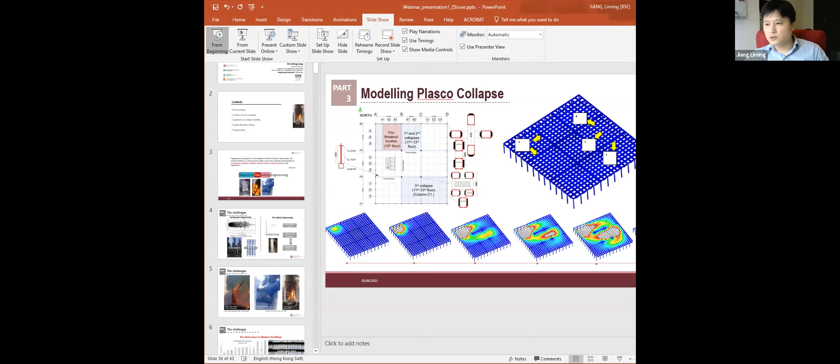I'm Liming Jiang. I'm currently assistant professor in building services engineering in Hong Kong PolyU. I'm working in the area of fire safety of building structures, and particularly we focus a lot more on computational modeling, but we also do experimental test work.

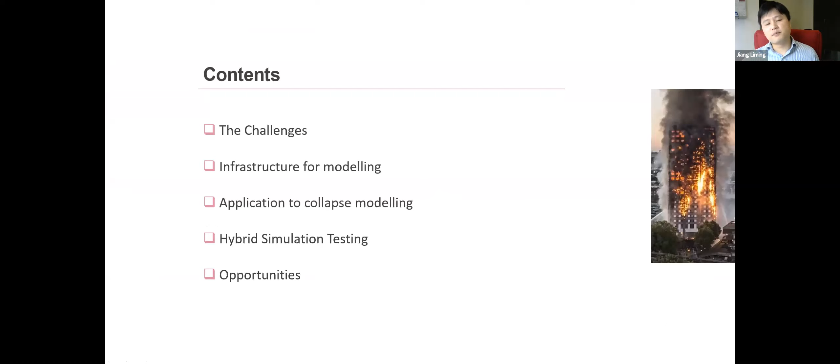So I might start with some challenges in my mind about modeling building structures regarding fire safety. If you check Wikipedia, there is a definition of engineering: engineering is the application of knowledge in the form of science, mathematics, and empirical evidence to the innovation and design of structures, machines, materials, software, devices, systems. So if we look at the term structural fire safety engineering, we see these three keywords: structures, fire, which is loading, and we care about the safety of the structure.

And looking at the engineering definition, one of the powerful tools is software, which can be implemented with devices and systems to ensure the safety of buildings or structures in a fire. If you look at two different categories of civil engineering, one is to design structures against earthquake loading. We have a lot of tools to estimate the safety performance of buildings in earthquakes. We have a large library of ground motion curves to represent different levels of earthquake ground excitation, we can do shake table tests and cyclic loading tests, and FEM tools are ready to use for modeling earthquake responses.

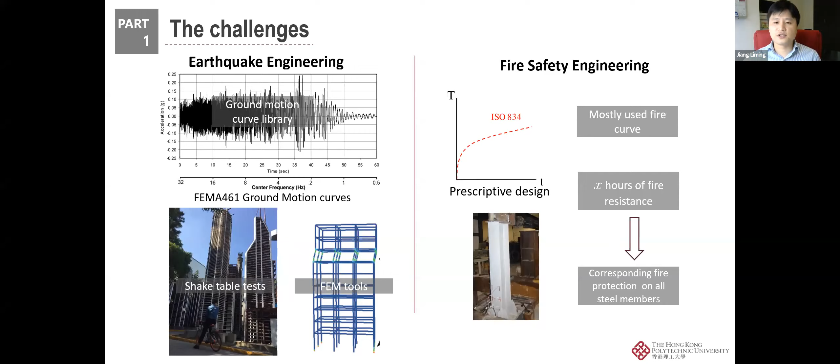But on the fire safety engineering side, in most countries and regions we still adopt the ISO 834 standard fire curve, which adopts a time-temperature curve with uniform temperature distribution. So the design of the structure is based on the prescriptive design approach. We basically apply fire protection or fire safety measures to meet the requirement of 2 hours or 3 hours of fire resistance. So these are two different levels of design regarding different loadings, and that's why we need to conduct more research to ensure the fire safety of buildings when fire becomes a major threat to the building.

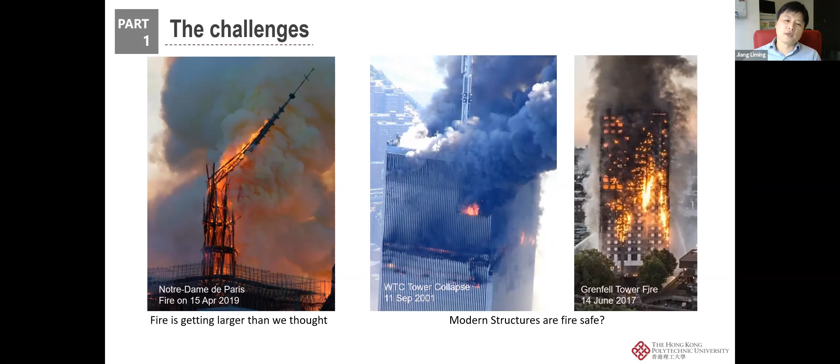So these are shocking cases, actually, totally out of our expectation, especially 9/11, the WTC tower collapse, which turned out to be caused by the fire rather than the impact loading of the airplanes. And in the recent Grenfell Tower fire in London, the scale of the fire hazard was beyond our expectation, and the fire spread all over the whole building. So that posed the question of whether modern structures are fire safe, and what is the resilience of these buildings in a fire scenario. This requires researchers and fire safety engineers to conduct experimental and numerical studies. But what are the real challenges now?

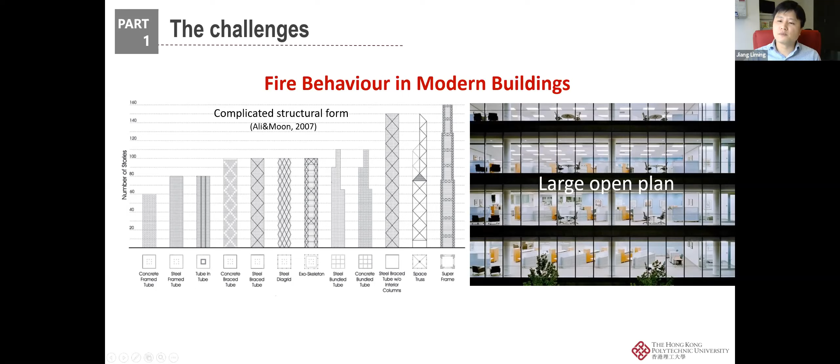For fire behavior in modern buildings, the left-hand figure shows the different forms of tall buildings. Engineers design these tall buildings with different frames, mega frames, and inside the building the compartment becomes a large open plan space. When fire occurs in this kind of large open plan compartment, the fire behavior is totally different from the traditional thinking, because the standard fire curve we just mentioned, based on a uniform time-temperature curve, is a post-flashover fire scenario.

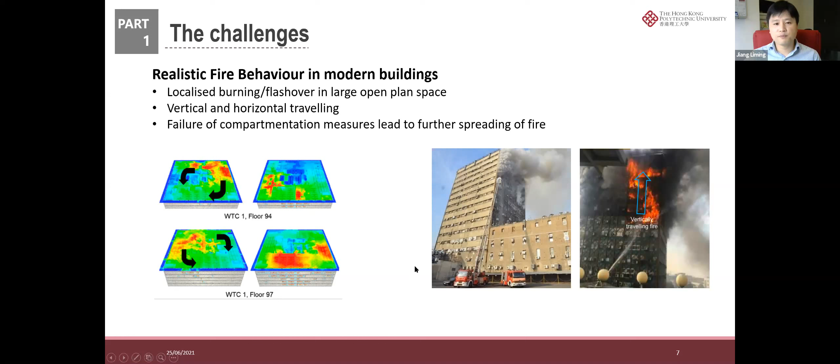But in reality, when the compartment is large enough, like in the investigations of the WTC towers, the burning is localized, and then the localized burning area actually travels along the floor plan. So that means the uniform time-temperature curve, or the ISO 834 curve, will not be valid to use in these scenarios. To determine the fire behavior requires a lot more research to characterize it. And one of the major movements is to introduce a traveling fire concept.

And this Malveira test was conducted by a group led by Professor Jose Torero, and I think you might be quite familiar with it. And this paper is written by Juan and other colleagues. So these tests actually demonstrate the different modes of the fire in a large compartment. It starts localized, and then it travels. So you see that the fire actually travels from the initial end to the other end, and localized flashover occurs at about 270 minutes.

So this is not what we thought about the compartment fire, because normally a compartment fire will have a localized fire at a very early stage, and then the spontaneous ignition of all the combustible materials causes the flashover, and then it enters a very high temperature regime. But this traveling fire test actually demonstrates that the traditional thinking, or the traditional model for fire safety design, may not be valid in modern structures.

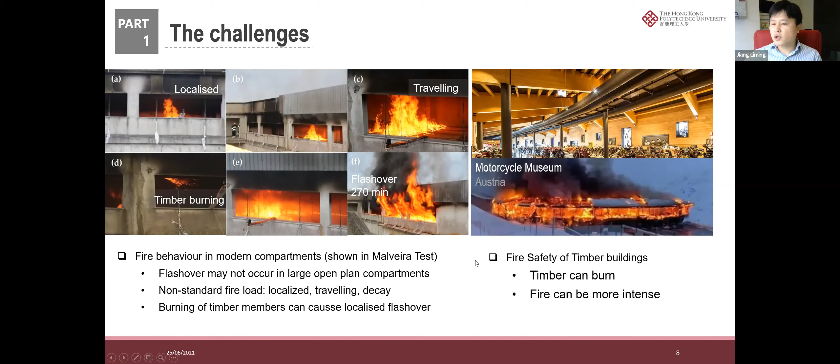And especially when we're trying to use innovative structural materials like timber, CLT, or glulam. These timber materials also introduce another challenge, because the timber material itself can burn in a fire. So the parametric fire model will be completely different, because there will be another surge of heat flux when the structural members get ignited.

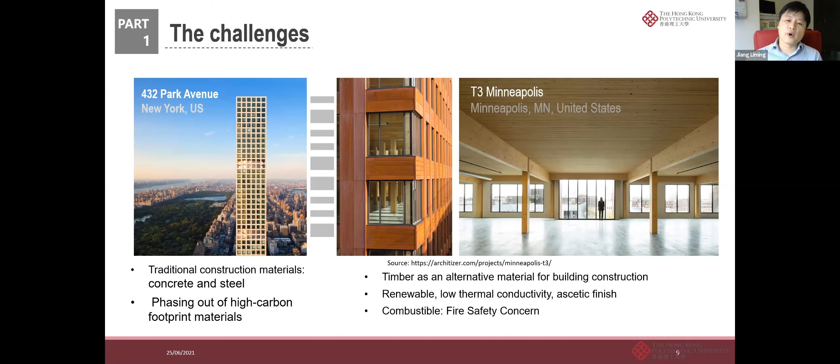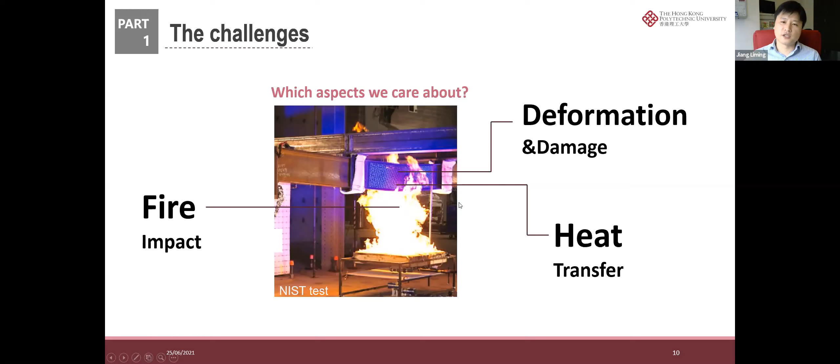So then the structural member, like here a steel beam, will experience deformation and damage if the fire is large enough. To understand this behavior, from the fire to the structural response after material degradation and thermal expansion, two categories of approaches can be used. We can use lab tests or real-scale tests, like the NIST test, or the famous Cardington test, a whole 8-story building at real building scale that was tested. From this Cardington test, we learned a lot of different mechanisms we had never paid attention to, like the effect of the floor slabs.

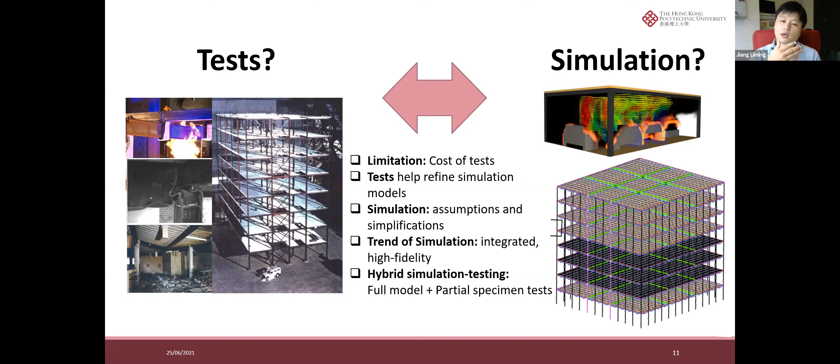For the other category, we can surely use simulation, because computers are now critical in our daily life, and you can use all this computational power every minute. But what are the limitations? For tests, it's the cost, and for simulation, we need to adopt assumptions and simplifications. That's why a lot of researchers may be skeptical of simulation results; they are more confident in test results and don't trust simulation because of the lack of fidelity. But in the end we need to use simulation as our tool, because we cannot do design using real-scale tests. So that requires a simulation tool to predict the behavior of a building in a fire.

So what is our solution? In 2009, at the University of Edinburgh, we adopted OpenSees as our platform to conduct structures in fire analysis. OpenSees originated from UC Berkeley and was initially designed as an open system for earthquake engineering simulation. It is open source, written in C++, the interpreter scripting language is Tcl, and recently Python was enabled. For OpenSees for fire, we reshaped the original open source code, extended the modules, and added new modules to simulate structures in fire. So we have the fire modules, the heat transfer, and a lot of code for the thermo-mechanical analysis.

And recently we have the OpenFire project that connected to the CFD tool FDS, and connected FDS to the OpenSees HT, the heat transfer module. So this actually enables us to do a lot of research, frees our hands to realize a lot of ideas that are in our mind when we're doing the investigation, because OpenSees for Fire is a modular

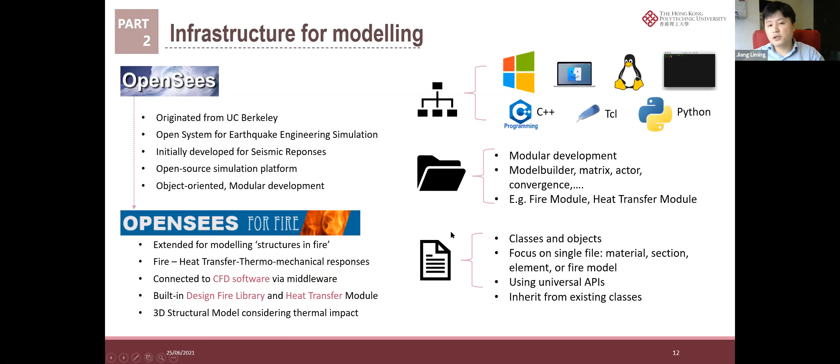So that significantly reduces the learning effort in conducting new computational approaches or methods when you have some great ideas for modeling something. This open source environment significantly reduces the learning effort compared to other software packages, because they are written in Fortran, which is structure based, so it does not have this modular development environment.

So we have a website which is maintained for OpenSees for Fire, and you can browse all this information, and we also provide its command manual and examples. This website is always under development because we are putting in a lot of new codes and new examples along with our published papers. You can follow all of these updates on GitHub, and you can see the command manuals and examples on this website. So you can search for OpenSees for Fire, and you will be guided to this website.

So as we mentioned, within this platform we are focusing on 3 different aspects of fire. First, the design fire models. If you recall, for the earthquake engineering problem, we have a lot of ground motion curves. So we can have small, moderate, or large earthquakes, which represent the different levels of loading that can cause damage, failure or collapse of the structure. But for fire, we don't have this library.

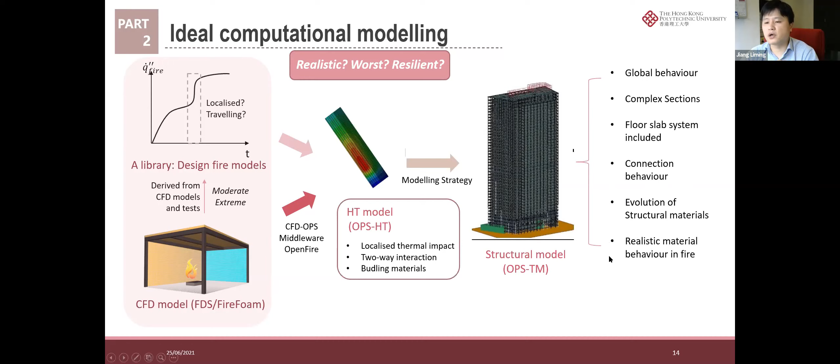And also when we have these new structural materials, that also causes a challenge in the structural modeling. So this is a roadmap of our OpenSees for fire, and by 2020 and 2020 to 2021, these are almost done. So in terms of the different categories or modules, we have done this work, and we have our planned work that is after 2021.

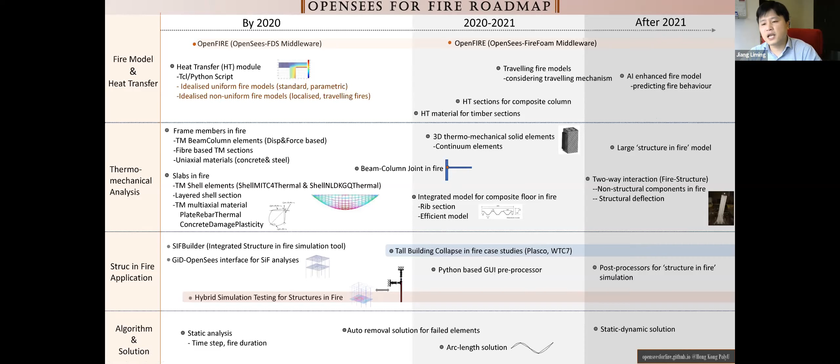So then it's gradually adding into OpenSees for fire, and we are happy to collaborate with other research groups. If you have some findings you want to implement in OpenSees for fire or in an FEM platform, we can help you to implement this.

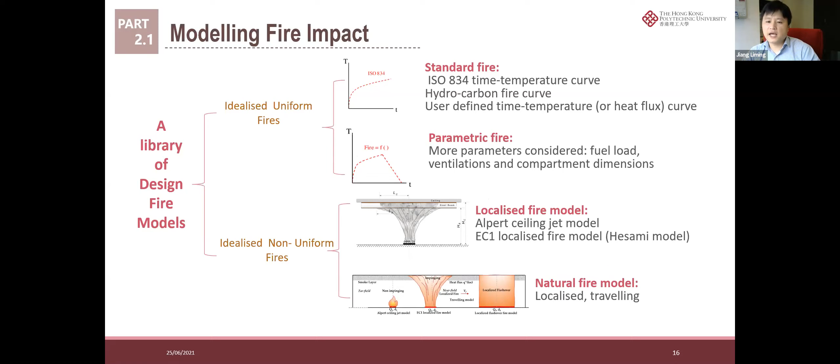And for modeling the fire impact, as we just mentioned, we try to establish a library of design fire models. So it's not limited to the standard fire, parametric fire, and localized fire models. We want to introduce some natural fire models representing moderate and extreme fire scenarios, and it also represents the traveling behavior horizontally and vertically. So that is our vision for the design fire models corresponding to the ground motion curves in earthquake engineering.

And as we mentioned, another approach is to connect OpenSees with FDS or CFD, like FireFOAM. FDS could be the CFD tool. So that is to create a middleware which transfers the data from FDS or FireFOAM to the heat transfer module in OpenSees. This is currently ongoing, and we are adding more elements or components into the OpenFire wrapper. That is carried out by Atif, one of our PhD students in the group.

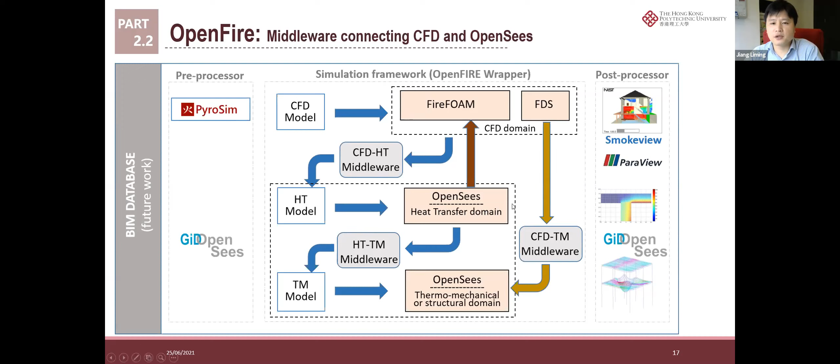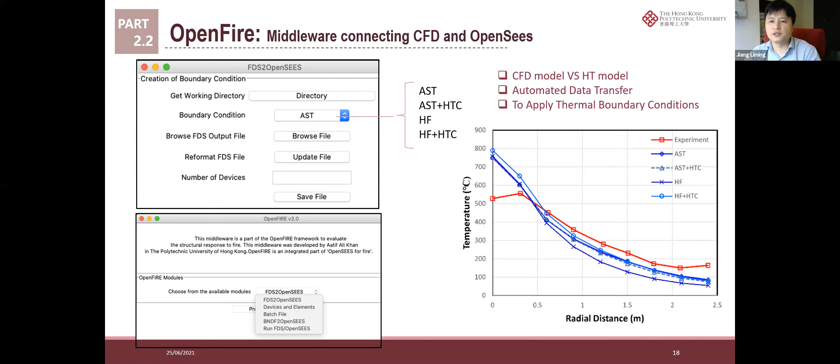So OpenFire is written in Python, and you will have drop-down options where you can choose the different boundary conditions. It's meant to be a graphical user interface, and it will simplify the modeling work between FDS and OpenSees HT. You can have a realistic CFD model and then implement this CFD model in OpenSees HT. So you can either use the AST or AST plus the heat transfer coefficient. We can make some sophisticated heat transfer boundary conditions between the fire and the heat transfer model.

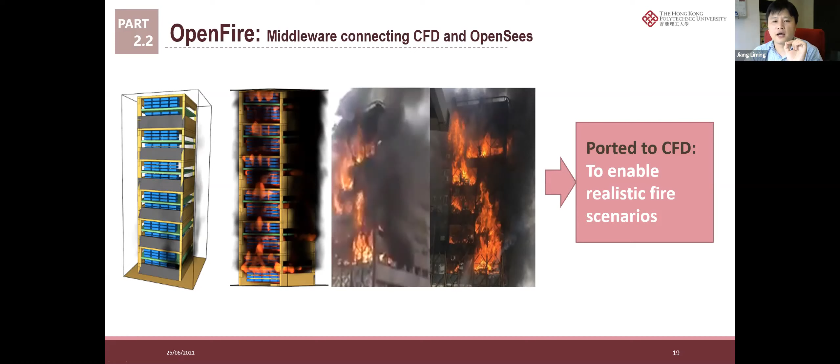So when we're modeling heat transfer, we know that the temperature of the structural member section will increase in a fire, because at the surface, due to convection and radiation, there will be input heat flux, and on the unexposed side there will be heat loss to the ambient air.

So when we're trying to model the heat transfer, some problems have been mentioned, like how we address the localized fire impact, and also how to address the heat transfer in some new structural materials like timber, and also some non-structural materials like fire protection materials that should be modeled in the heat transfer process.

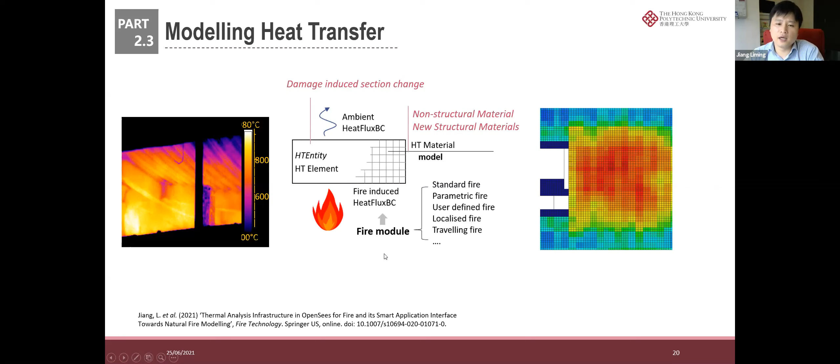And also the damage-induced section change. That will change the exposed surface of the structural section. The heat transfer will change significantly if the section changes, like the concrete cover being removed due to spalling. That will change the depth of the heated region. So these are the heat transfer issues that we are trying to resolve.

So for the localized and non-uniform time-variant fire impact, I think it's currently a reasonable assumption that we model the heat transfer on a structural member basis. So we analyze the heat transfer in each single member, like a beam, column or slab. And we have examined whether we can use 3D or a number of 2D sections to estimate the heat transfer in the structural members.

Because if you use 3D, heat transfer normally requires a lot more elements to capture the heat gradient, because near the exposed surface the temperature gradient is significant. So then we need a large number of elements.

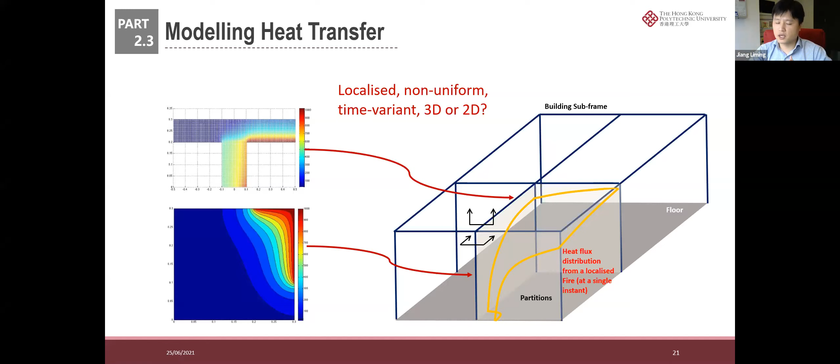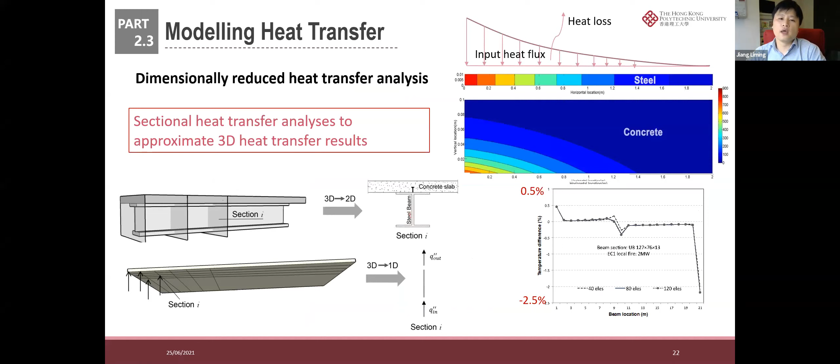So if you use a 3D member or 3D heat transfer model for the whole building, when the fire is hitting different compartments, then the heat transfer analysis will require a lot more computational resource. So one of the solutions is to use a 2D sectional analysis. And we found that if the input heat flux is continuous, then we can use this 2D analysis just at the representative sections to estimate the heat transfer. So this is for the heat transfer issue for concrete and steel structure members.

So if we have timber sections, which again showcases the great capability of an open source platform, we can implement our ideas modeling the timber sections subject to fire, because we know that timber forms different layers when it is exposed to fire. We can have a layer transition modeled in the timber section, with a tag to represent the different layers, changing from the original wet wood to dry wood and to the char layer. And specifically, we can have the heat generation calculated or modeled in the char layer.

So that can address the low heat flux environment. Like when the heat flux is only 20 kilowatt per meter square, we know that the timber member can be ignited. But if you're using the Eurocode 5 model, it's a heat consumption model. It does not have any heat generation. So you will never be able to model this kind of situation using the EC5 model. The only solution is to introduce the heat generation into the char layer. And so in our platform, we have added this for the timber sections.

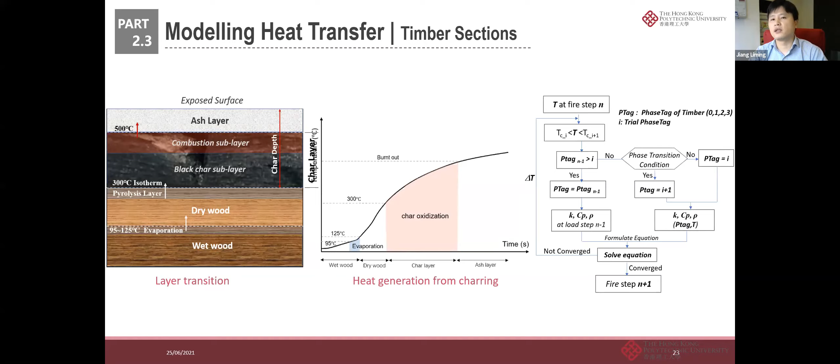And the next step, we are now developing the structural model for the timber components. So this open source and object-oriented platform has enabled us to model these timber sections and others. We can actually introduce more innovative structural materials if we have the options. If we have a list, we can introduce more, and we can use this software to estimate the thermal response and the structural response, and then validate the results using tests.

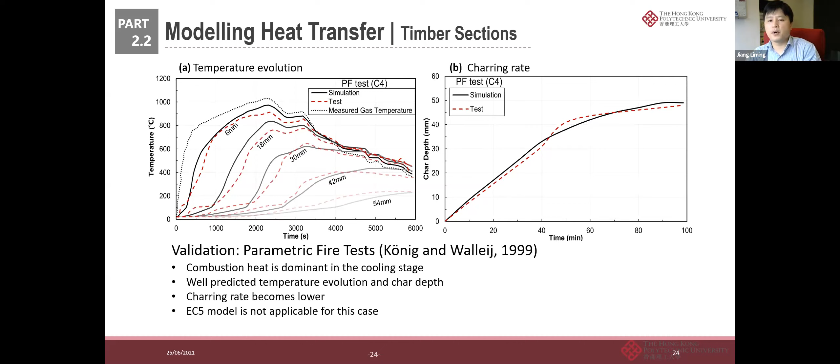In our paper, we have presented a lot of different cases using heat flux and other cases, like heating, cooling and reheating. So we validated our results. So this again demonstrates how real tests can help the advances of the modeling software. So we always need to rely on the tests and the software, but in the end the software will be a key solution, because we need to predict the behavior rather than using tests to capture the behavior.

So for the structural response, for earthquakes, you may be able to use a 2D plane frame model, or you can just use a lumped mass model to capture the behavior, because the slab can follow the rigid slab assumption in earthquakes. But in fire scenarios, we know that in a compartment fire, the slabs co-working with the beams and columns will behave completely differently if we take out the slabs.

So that's why for a high fidelity 3D model we need to model the slabs, which is a great challenge for our work in OpenSees for fire, because the original OpenSees does not have any suitable slab model for fire or for earthquakes. So we need to build all these components for the slabs.

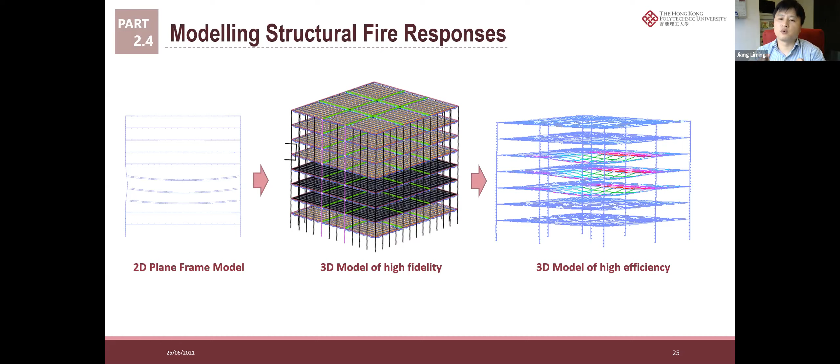And after that, the next step, we're looking at how to efficiently model a whole structure or a large model, and how to improve the efficiency of this model. So we need to find the real factors, and then reduce the scale of the models, because otherwise we cannot do a faster response or prediction model, especially in an emergency case. We need to very quickly estimate what will be the next failure or the collapse.

So for the whole structure model, the traditional approach uses beam elements or beam column elements to represent the beams and columns, which is quite efficient because it's just like a bar, and you can use uniaxial material to capture the behavior of this flexural beam. We have fiber-based sections, and you can have the displacement beam column 2D, 3D as a structural model, which is very common.

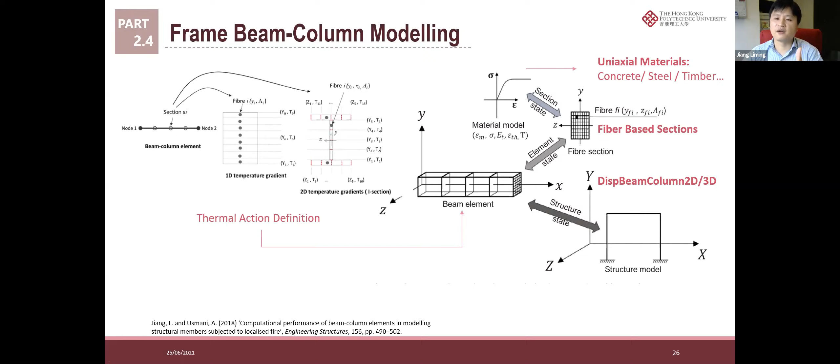And for the fire cases, we have tried to address the localized fire action for these beam elements. So that is another challenge when we have this complex fire behavior: how we model the frame's response to complex fire behavior, like fire that travels in the floor and vertically.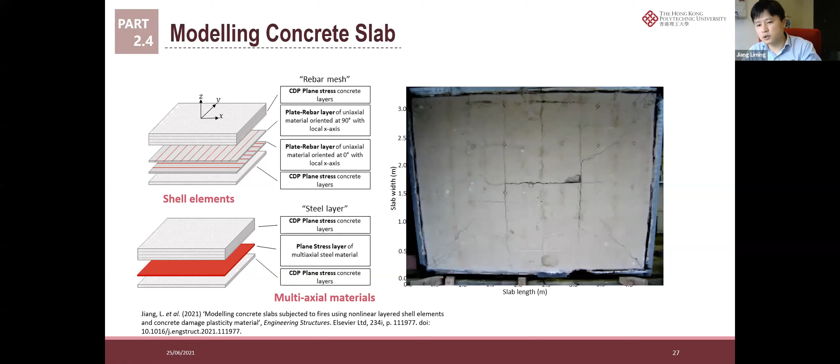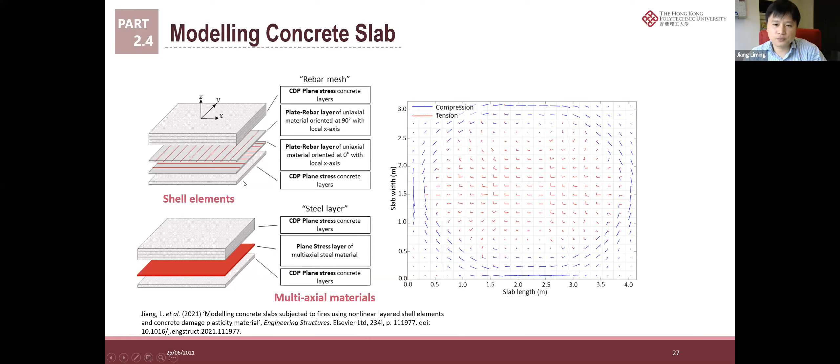When we look at real steel buildings, we know that composite floor slab with profiled steel decking is a common choice for steel or composite structures. And this kind of geometry raises the complexity of modeling. So in our recently submitted paper, we try to model this composite floor slab in the context of a large model. We cannot use a very detailed 3D model to represent the flat or thin part and the thick or ribbed part.

We need to achieve a balance between model efficiency and accuracy. So what we propose is to use an offset reference plane, and then we can have this tapered section modeled in the composite slab section. We package all these definitions in one section, which is a composite floor slab section. That's what we compliment about the open source OpenSees for Fire, because we can just focus on one class to realize this modeling approach.

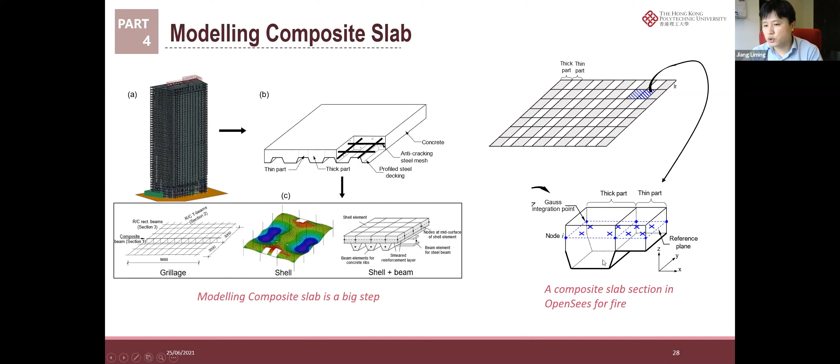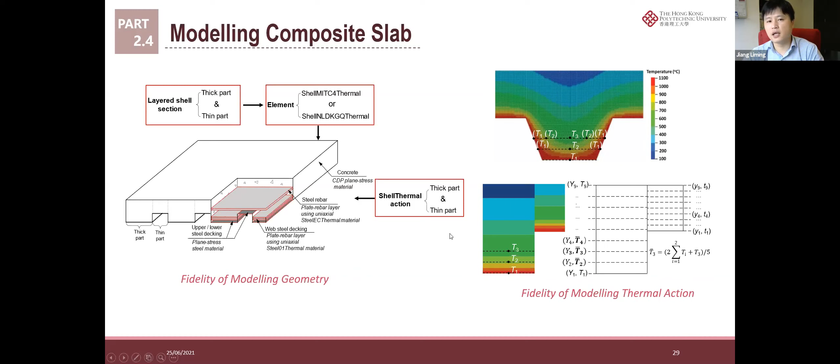Here, we demonstrate that we just use a composite slab section, which can deal with the geometry and also the thermal action. With the offset reference plane, the ribs are represented with a higher thickness, and we can have the steel decking with layers to represent the materials, concrete and steel. In terms of the thermal action, we can estimate the U-shape temperature distribution in the rib section. This is all packaged in the composite slab section, and we can still use the normal shell elements and all these analysis components.

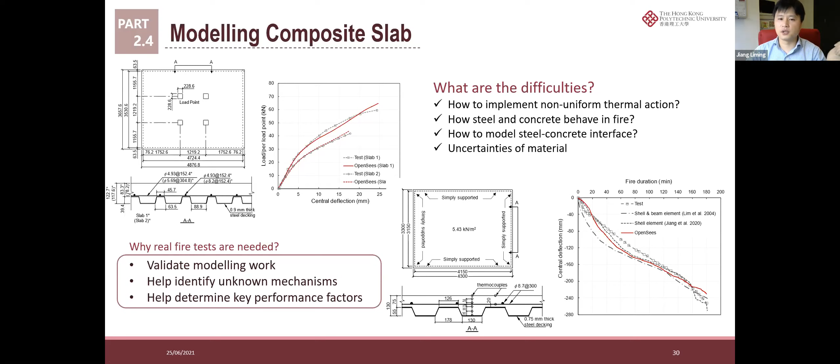So these are the validation cases. I may not further explain them, but you can see the difficulties we mentioned because of the geometry, and we need real fire tests to validate our work. Tests and simulations should always be conducted to improve our understanding of the different behaviors of structures in fire.

And also we need to model the connections. Recently we started to look at connection behavior. We have a behavior model for a connection, a zero-length element between the columns and the beams, and we also have an element removal technique. Once the connection reaches a critical limit of deflection or deformation, that means failure of the connection. So we can remove this connection to represent, after failure, what the structural response will be and how the global behavior is changed by the removed elements.

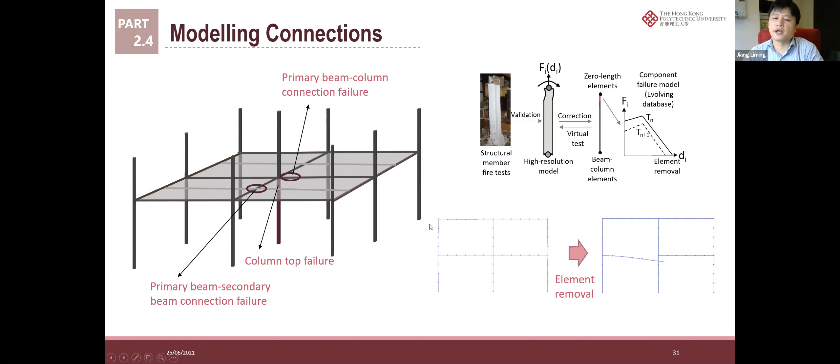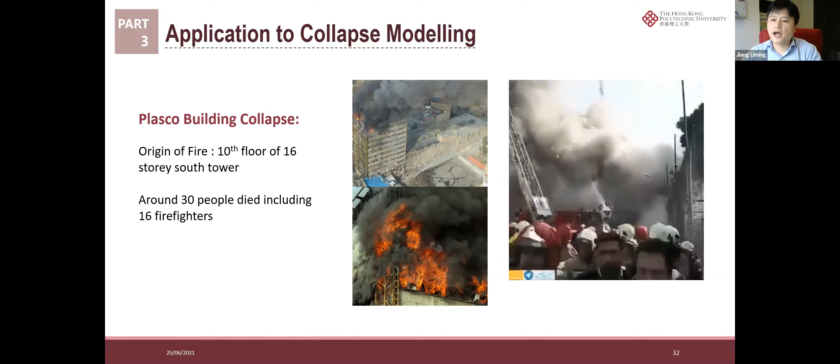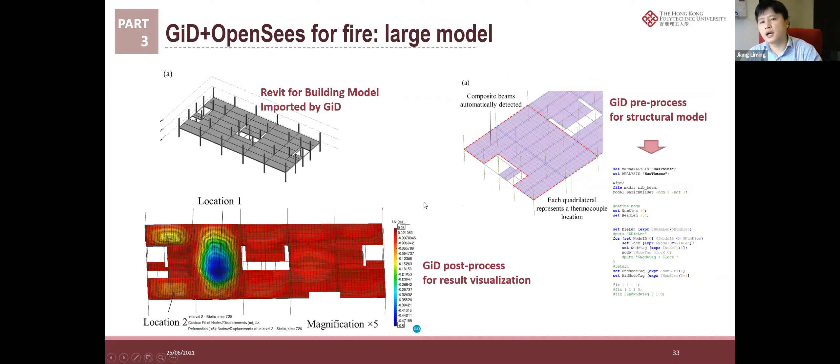So when we are trying to model this, one tool is to use the GiD-OpenSees tool. This is also one toolkit that we're developing for the GUI, the graphic user interface. You can find further details about this in our papers. Here we use Revit as a building model, and then we import the model to GiD to run analysis with OpenSees for fire.

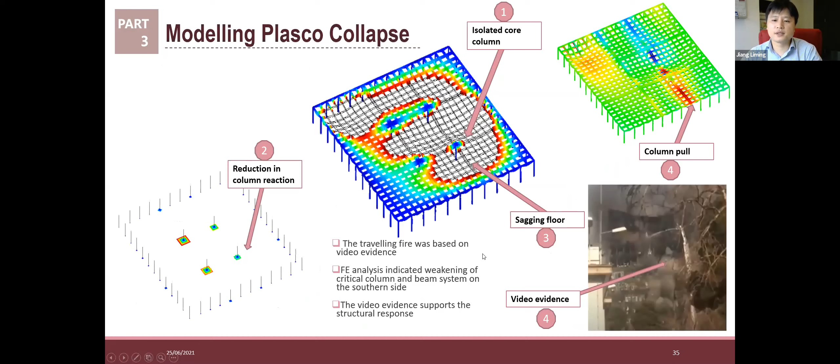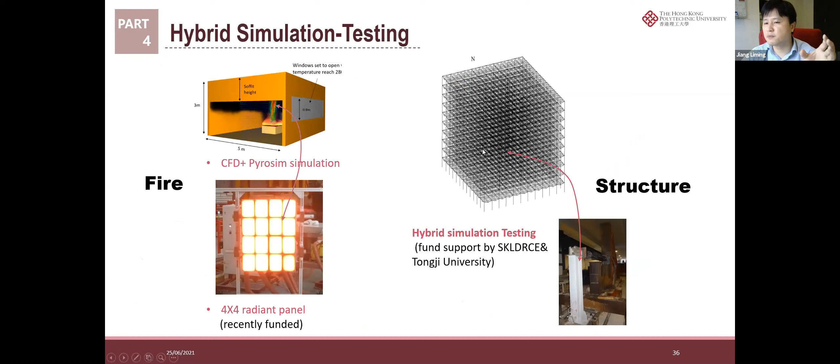So here, modeling the collapse, you can see the effect of the traveling fire and how we capture this deflection. But this one is still just a grillage model. So the next stage is that we can use hybrid simulation testing. The idea is that we can have a substructure test in the lab, and the global behavior can be modeled with a whole structure model.

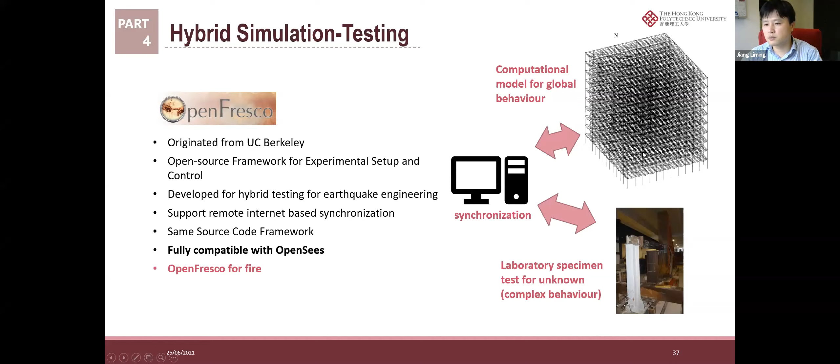That is being conducted with OpenFresco, which also originated from UC Berkeley and adopts the same open source framework for experimental setup. Currently we are dedicated to developing a version of OpenFresco for fire. It enables remote synchronization between the global structure model and the laboratory specimen test. This is one work that we have presented in our paper in Engineering Structures.

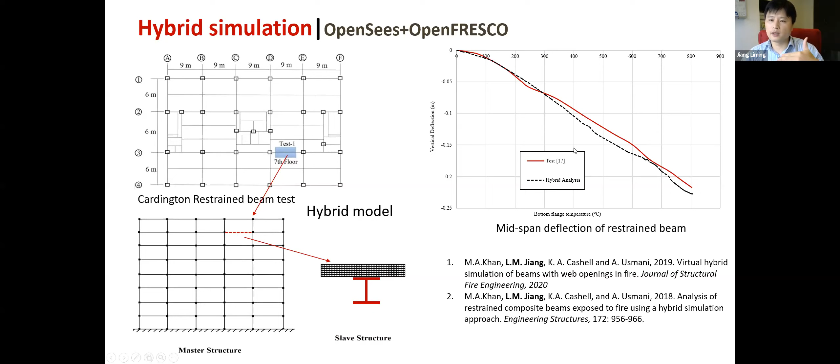This is a hybrid simulation. We can have a detailed model representing the laboratory specimen, synchronized through OpenFresco to a frame structure model, the whole structure model, which shows the same behavior. But in the next stage, we need to use the detailed model to capture the localized buckling and the fracture of the fire protection. These will be other work packages focusing on using OpenSees for fire, which is going to be a platform for hybrid simulation testing.